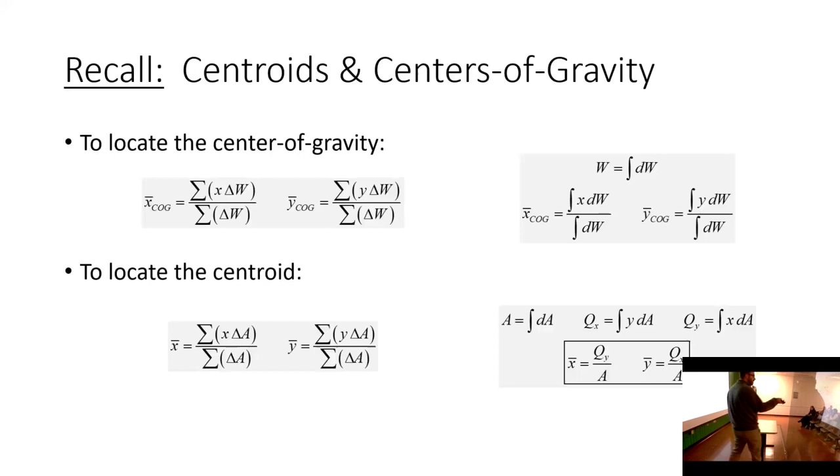Okay, so let's talk about centroids of 3D bodies or volumes. I think you could probably predict by now how we're going to do this. If you remember, if we wanted to locate a centroid, we're computing a weighted average of the areas. If we have a line group like a truss, but in your last homework assignment, we just compute the weighted average of those line segments. Well, for areas, we end up using our centroid references as well.

For volumes, we're just computing a weighted average of the volumes. So if we want X bar, it's the sum of X times the volumes divided by the sum of the volumes. For Y bar and Z bar, respectively, it's all the same thing. So instead of summing or integrating in terms of area, we're summing or integrating in terms of volume.

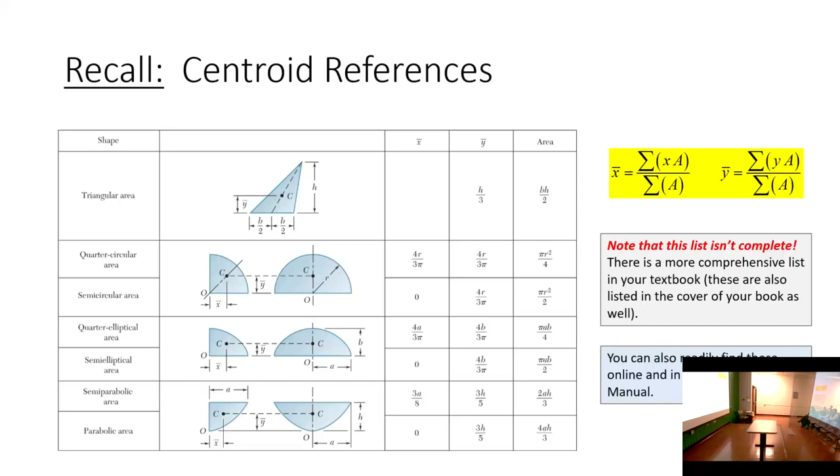Now, one of the interesting things about this is that by and large, a lot of times you're still able to utilize these as your centroid references. It is only when the shapes truly become three-dimensional that you really need to worry about dealing with 3D centroid references. What I mean by that might be something like a hemisphere or a semi-ellipsoid. To be frank, we're not really going to worry about a lot of that in here. A lot of the components that we would need to be worried about in engineering are hopefully ones that we can break down into relatively easy cross sections to deal with.

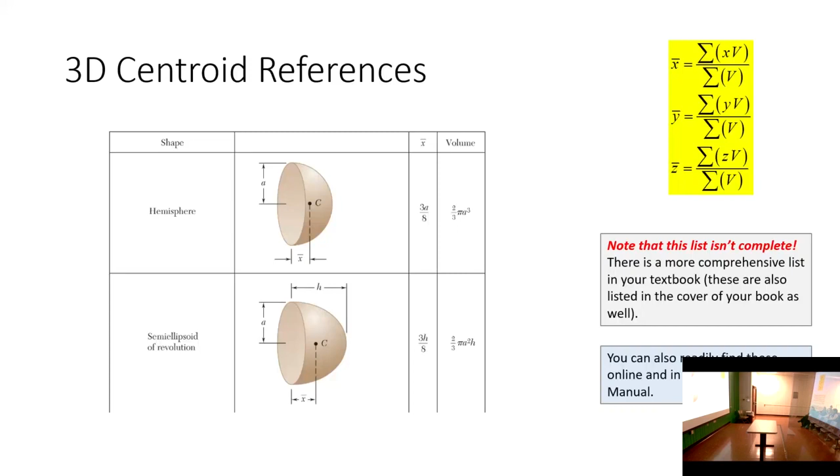So what we're going to do today is look at this machine part, and we're going to look at determining the centroid of this machine part. Probably what we won't do is compute X bar, Y bar, and Z bar—we'll probably just do one of them. But what we are going to do is break this down into simple shapes and compute the X, Y, and Z for each of the individual shapes.

Because if you get that and you know how to compute, let's say, Z bar, well, then X bar and Y bar are incredibly easy to understand. And again, as I said, this is a 3D part, but I think we're going to be able to make use of a lot of our 2D references, and you'll see what I mean here in a bit.

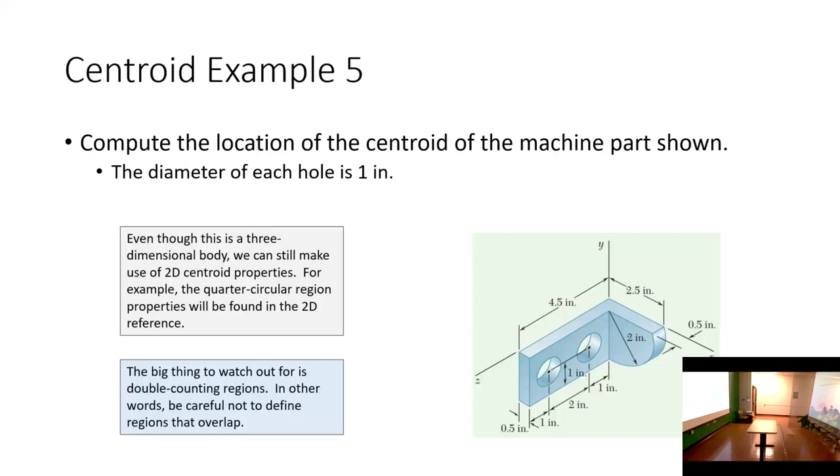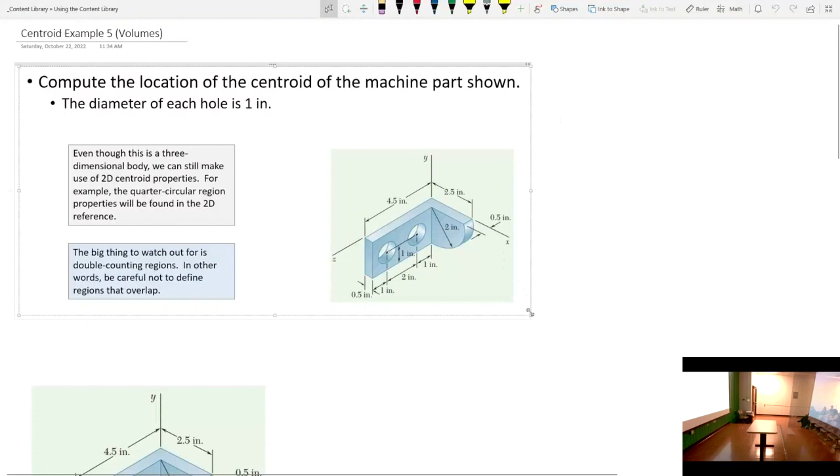Okay, so let me make this a little bigger so that we all can see what's going on.

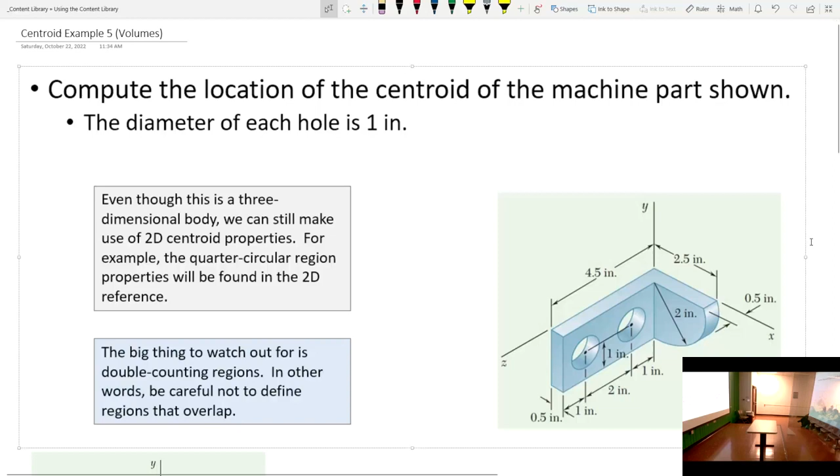Now, in order to do this problem, we need to break this down into a series of simple shapes. I kind of cheated a little bit because I've got the cross-section, or the schematic, copy and pasted over and over again so I don't have to keep scrolling up and down. But the idea is that as we break this down, we can use this to ensure our bookkeeping is done appropriately.

So what we're going to do is break this down into a series of what I'd call simple shapes. We're essentially going to have 4 regions to deal with: a rectangular prism, this quarter circle region, and 2 circular holes. For each of these, we need to compute not only the x, y, and z for the centroid of these individual shapes, but also the volume.

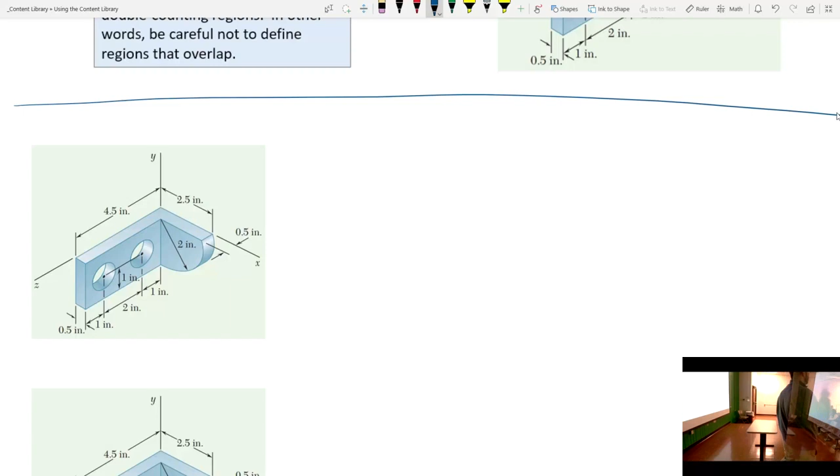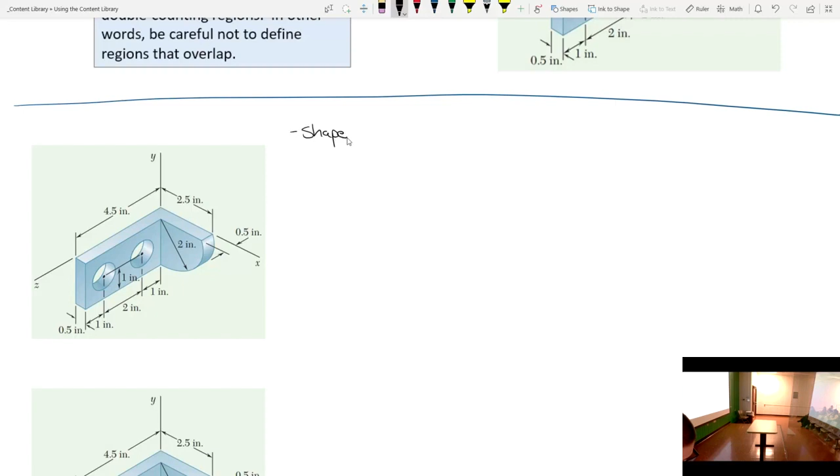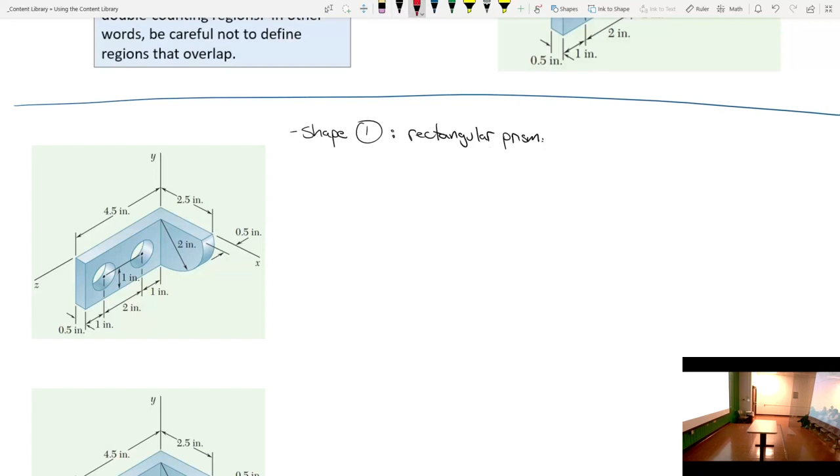So let's start with what I'll call shape 1. Shape 1 is a rectangular prism. Let me try and draw this out. I'll show you the way I'm going to split this up, and probably the most important region to focus on is this overlap region right here.

So let's look at this circular region right here. The radius is this corner part, because this is 2 inches down to this being 2 inches. So really what I want to do is break off that circular region, so I'm going to basically say that this is my prism.

And what we'll do is draw some dashed lines here and some dashed lines there to indicate that that's the prism we're looking at. Now I'm going to redraw this prism over here so we're all cognizant of the dimensions and data we need to consider. So it's going to look something like this.

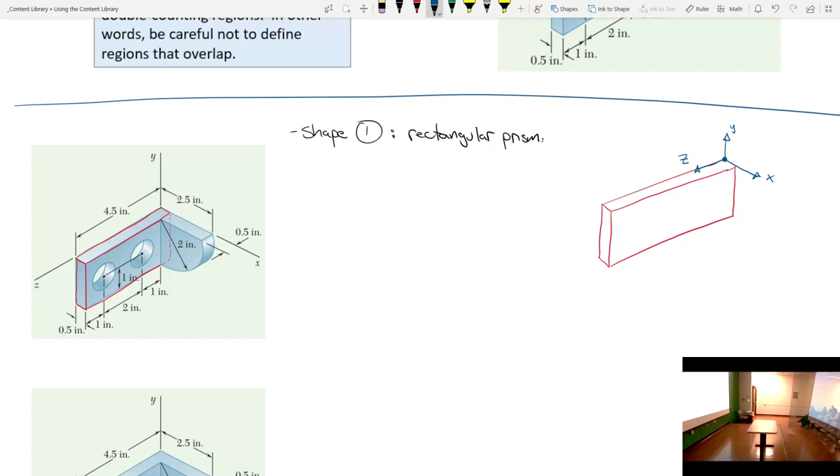How wide is this prism along the x-axis? Half an inch. How about how tall is it along the y? Does anybody know what that is? 2 inches, exactly. While it's not explicitly called out, that's where the radius of this circular region comes in. And how about the length along the z? 4.5 inches, exactly. So that means this dimension here...

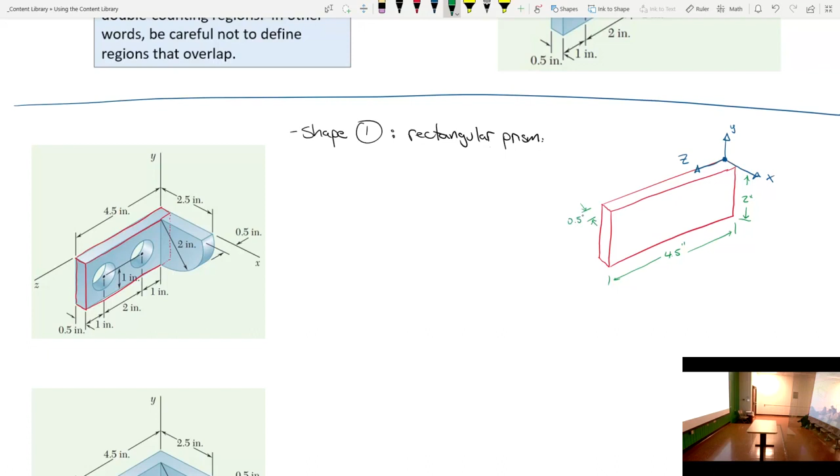So there we go, in order to compute the volume: 0.5 multiplied by 2, times 4.5, is 4.5. So that's going to be 4.5 inches cubed.

But I also want an X, Y, and Z. What I mean is, would you agree that for a rectangular box, the centroid is somewhere about right there? So my question is, with respect to this origin, what are the coordinates of that point? Along the x-axis, what are the coordinates? 0.25. What about along the y? Negative 1, not positive 1, negative 1, because here's the origin, we have to go down to get to the centroid. And along the z? 2.25. So this is going to be 0.25 inches.

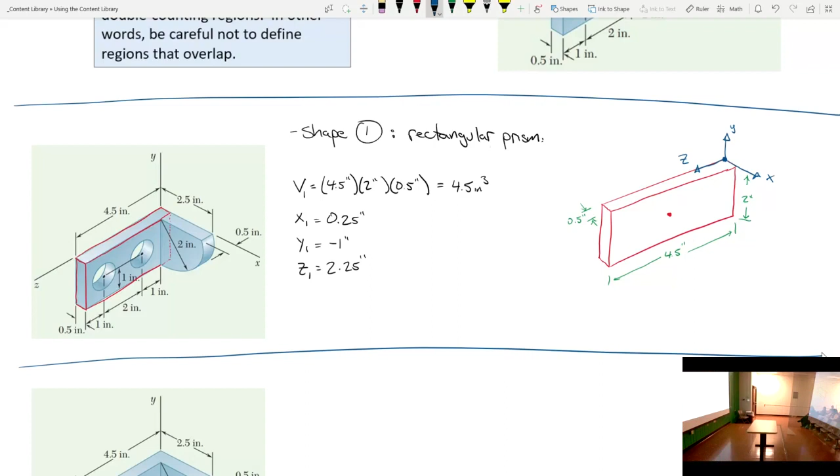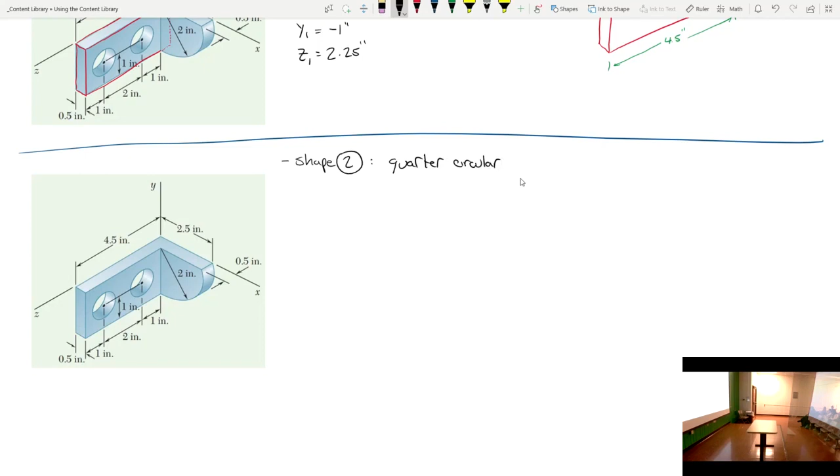Now let's go to shape 2. Let me move this down a little bit. So in this case, shape 2 is this quarter circular region.

Now I'm going to scroll up a little bit because we've got to make sure we don't overlap. Here's what I mean by overlapping. Would this be the quarter circular region? If I define the quarter circular region like this, to go from here all the way over, would that be right? You're shaking your head no. Why? Because I already accounted for this little wedge over here. That's exactly right.

So what that means is that region's got to look like this.

That's the region of interest. So you can see between this region and this region, I'm not overlapping. I'm not double counting area.

So now I have the unenviable task of trying to replicate this schematic over here. I will do my very best. Let's see. I think I did all right. I think I did okay.

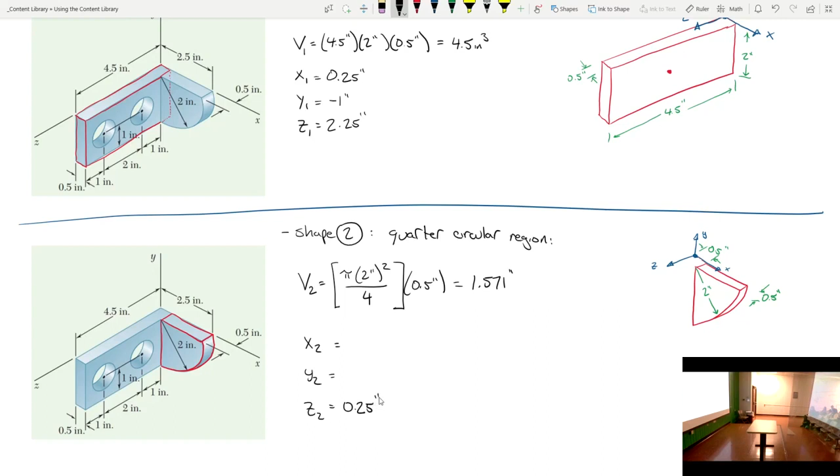But the other one, not so much. You may not remember that one, but that's why we have centroid references. That's why we can go back to this. And it's funny how I'm looking at the centroid references for a 2D region, not a 3D region, because really all this is a two-dimensional region that's been extruded. So if I have a quarter circular region, x bar and y bar is 4r over 3 pi. It's the same thing we have over here.

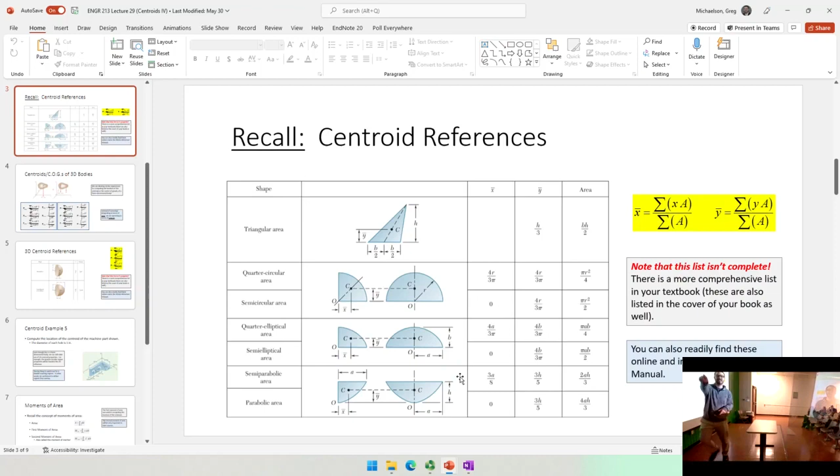So what I can do is say x bar is 4r over 3 pi. But is that right? I have to add half an inch. That's exactly right. Because 4r over 3 pi will get me from here to the centroid, but from the origin I have to shift over another half an inch.

Oh, drop my pen. Okay, I'll help you out with that one.

Now, what about y2? What's the formula going to be for y2? This is 4r over 3 pi plus a half an inch. What's y2 going to be? Do we have to add half an inch? We're just going down, but that's the key word. Say it again: negative 4r over 3 pi. Exactly.

Now, for shapes 3 and 4... we kind of need to come up with a numbering scheme. So let's call that one 3, that one 4. It doesn't really matter, we just need to pick one. Now they're both going to have the same volume.

And again, this is a circular region that's just been extruded. So the volume is going to be pi r squared times the thickness. But is that formula accurate? Shaking your head no, why? It's a hole, it needs to be negative. 100% right, we're removing that area.

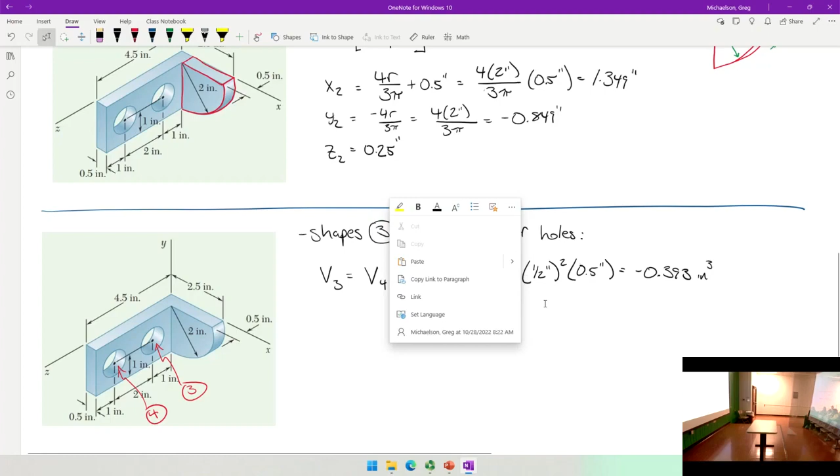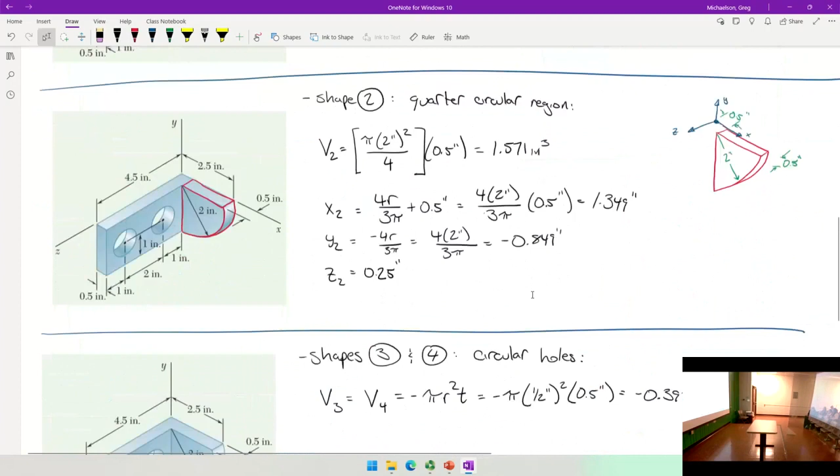Now, the problem said these were 1-inch diameter holes, or half-inch radius holes, and that's the thickness. So when it's all said and done, you plug and chug, you get negative 0.393 inches to the third. I just realized this whole time I've been saying the volume is inches, that's wrong, that's inches to the third. Oh okay, I got it right on the first one. Yeah, that's inches to the third.

But in order to do this, we're going to need an x3, y3, z3, and we're going to need an x4, y4, z4. So let's do the x's. How far is it from the origin to the center of these holes along the x-axis? Say it again—exactly, and that's the case for both of them.

All right, what about y? How far is it from here to the center of these holes? Negative 1. That's exactly right.

Really, the only one that changes is the z. So, how far is it from here to the center of this hole?

We'll start with just 3. 1.5 inches. It would be very easy to say it's 1 inch, but remember, 1 inch goes from here to here. You have to go another 1/2 inch to account for the thickness of the material. So this is 1.5. What about Z4?

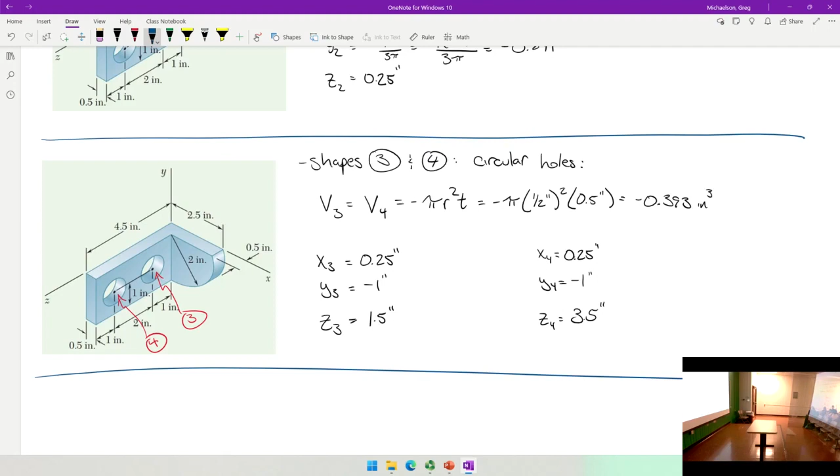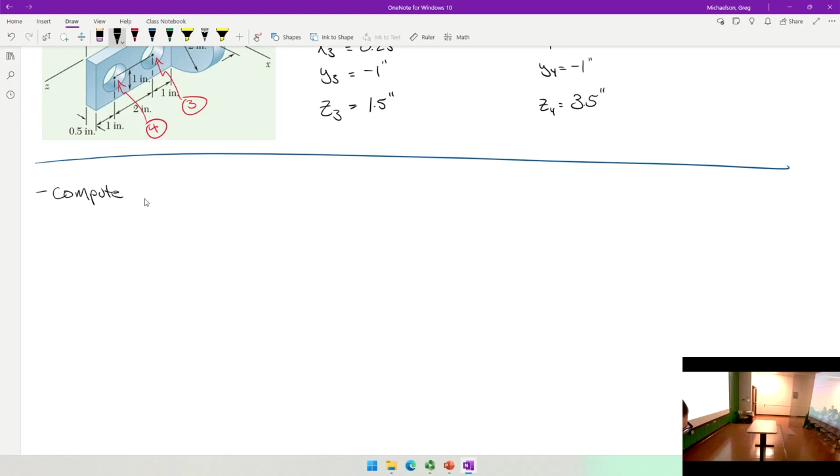Okay, so what I'm going to do is compute now the location of the centroid. But I'm only going to do one of them. I'm not going to do all 3, and you'll see what I mean. Once you do one, the rest are pretty easy. So what we'll do is we'll say we have a shape.

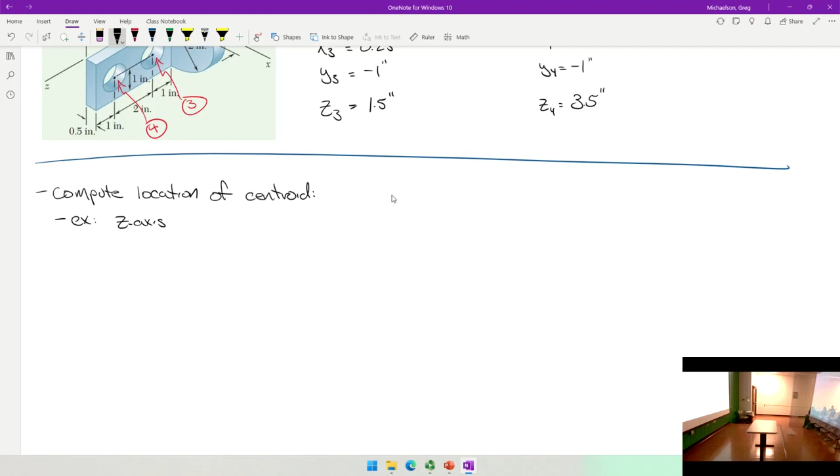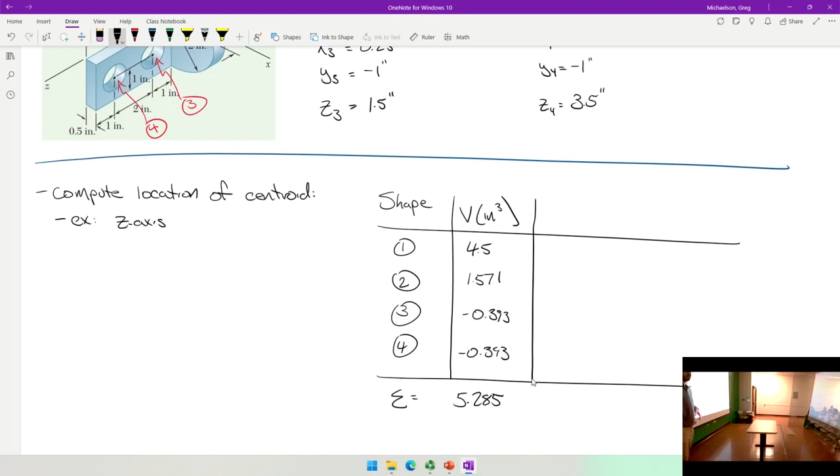And like I said, for this calculation, I'm only going to do the z-axis. But if I did the x and y, it'd be the exact same.

Now what I'm going to do is list the z coordinates. That was 2 1/4. That was 1/4. And then you can see the z3 and z4 right up there.

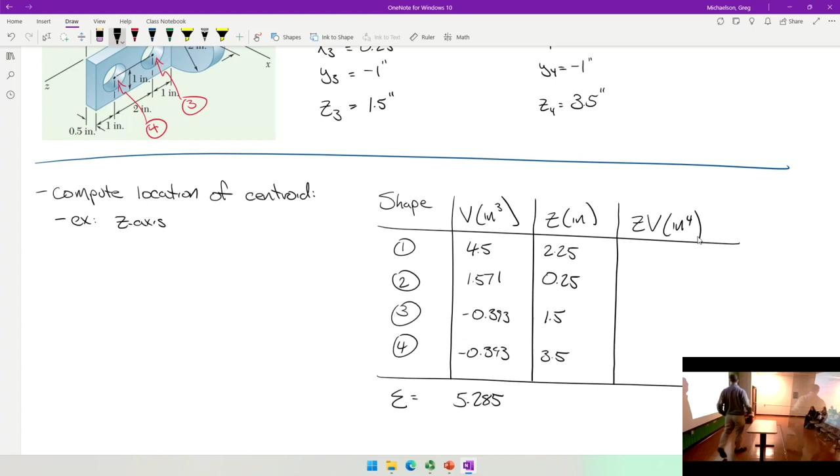And so now we're just going to multiply the two. I know the units might be a little weird, like inches to the fourth. Are we entering the fourth dimension? That's just a moment of area, or a moment of volume.

So what do we do? We just do that times that, that times that, that times that, that times that. We just chug it out.

Given that this is simplistic, I'm just going to do this one for you. So this is 10.125. This one's 0.393. This one ends up being negative 0.589, negative 1.374. And when you sum that up, you get 8.554.

I guess I put my leg up and I woke up Siri. All right, my phone's haunted, but it's Halloween, that makes sense. Come on, I'm gonna have jokes.

All right, so 8.554 inches to the fourth over 5.285 inches to the third, and you all can chug that out. Ends up being 1.618 inches.

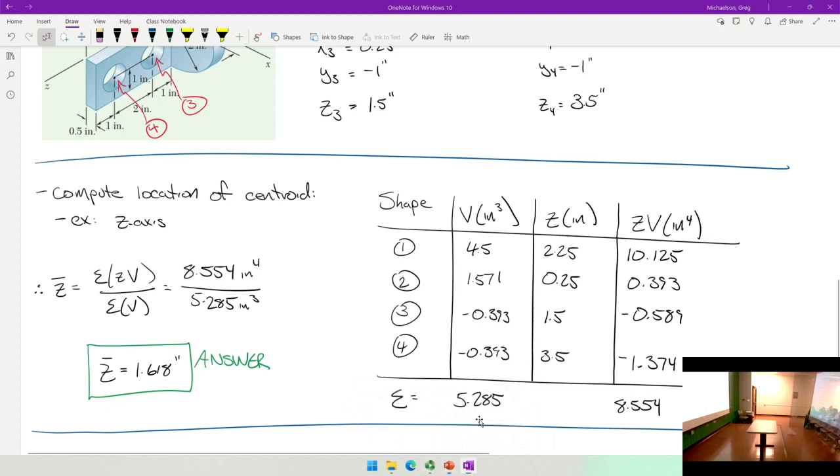I could define a second moment of area. I could define a 56th moment of area. And basically it would just be that differential element of area multiplied by that distance, however many times, or by that moment arm, however many times I deem appropriate. So the 57th moment of area would be the integral of x to the 57th times dA.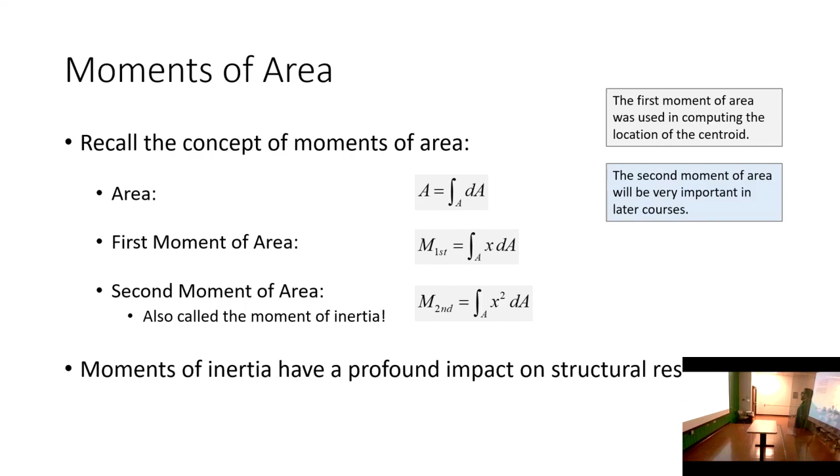Say again? It's harder to flex the beams that way. In other words, the beams are stronger that way. But why? Common sense tells you that, right? But why? I'm asking you why. I posit to you that the reason they are stronger that way is because along that orientation they have a larger moment of inertia. That's what the moment of inertia is, essentially.

In a nutshell, at least for the land of structural mechanics, and when I say structural mechanics, I don't mean just civil engineering. I'm talking about anything where you're taking an element and applying force to it. So this applies to you mechanicals designing machine parts and you biomedicals designing implant devices or anything that you're going to do. The orientation at which you apply forces has a profound impact on how it's going to perform, okay?

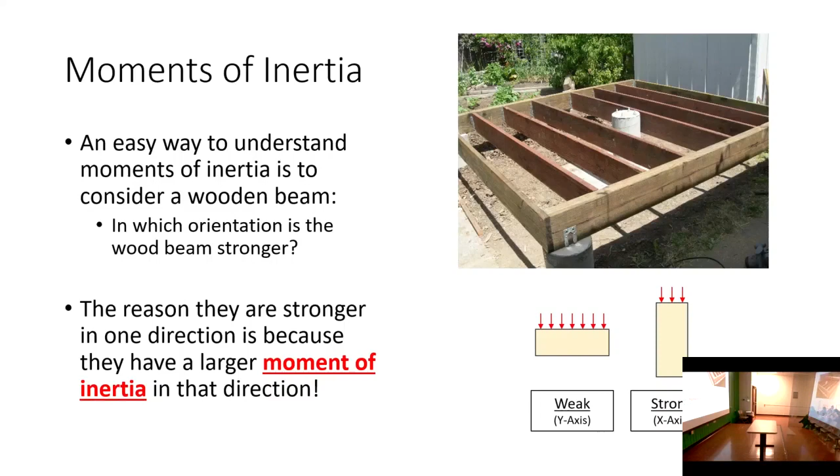This is a simple example to kind of wrap your head around it, but there are applications in just about any field of engineering. And so that orientation, I think it makes sense, but I'd like to apply some mathematical rigor to it. What we're going to do is go about looking at the moment of inertia of a basic region like this.

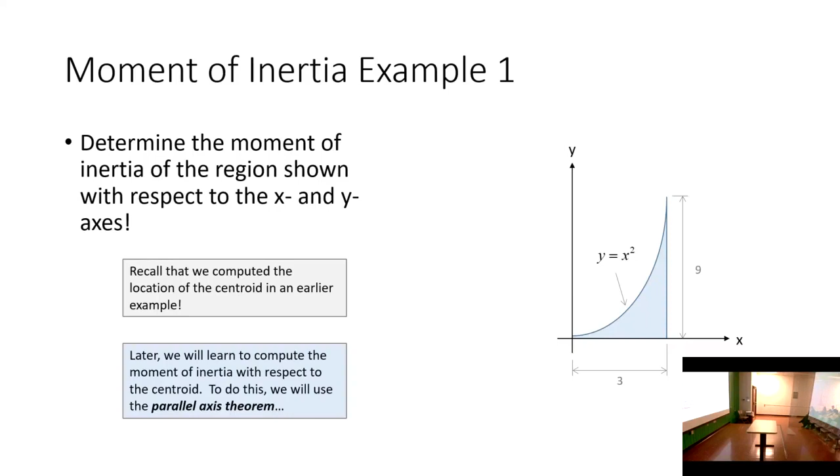And remember, we kind of did this before. We looked at this region, and I want to show you what happens when it comes to computing the moment of inertia. Just to make sure we're connecting this to concepts we've already done, remember we had one homework assignment where I made you derive a formula. But then past that, we said we're just going to use the formulas to compute the moment of inertia, or compute the centroid, of composite shapes. Same thing's true with the moment of inertia, so it's going to be a pretty straightforward algorithm, but we'll get to that later.

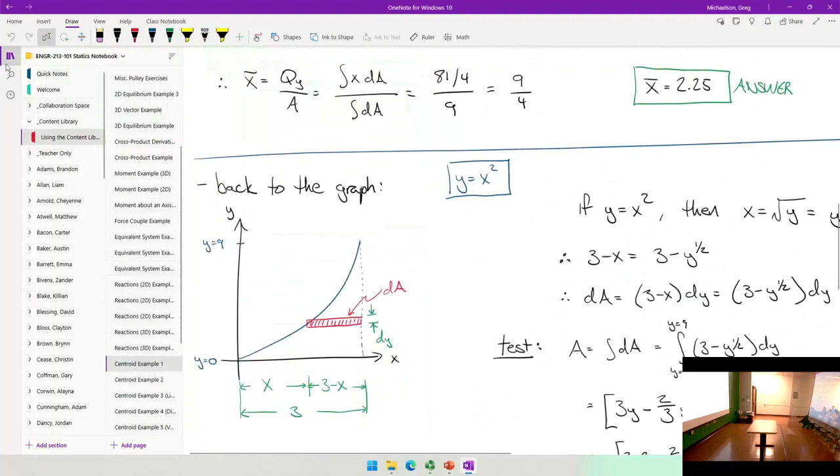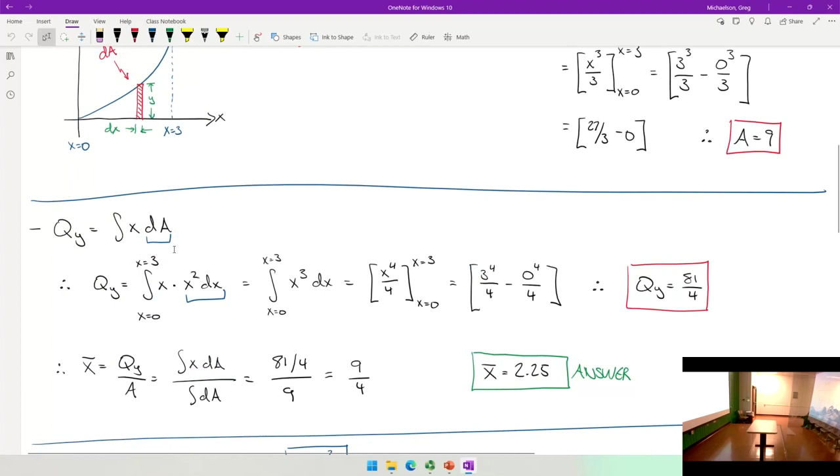So let me refresh everybody's memory real quick. We had done this shape before, and we found the location of the centroid of this region. The way we did that is we first started off by integrating dA to determine the area. We defined what this rectangle looked like, and we integrated and got an area of 9. Then we computed our first moments of area: we calculated the integral of x dA to get x bar, then computed the integral of y dA.

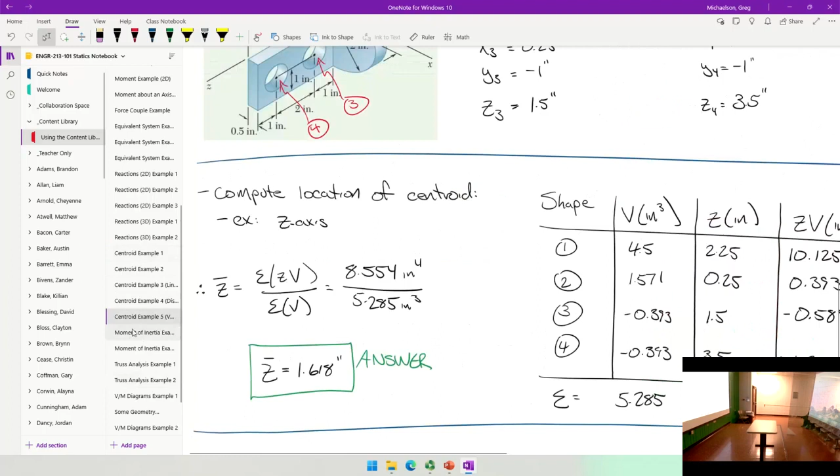We got y bar. So now all we're doing is computing the integral of y squared. Shouldn't really be anything that's all that challenging, but just trying to connect this to some stuff that we've already done before.

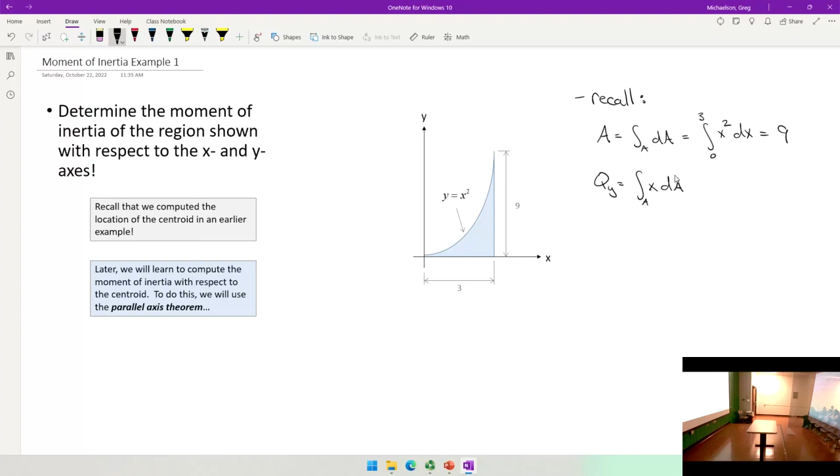So what I'll do is I will say... remember the subscripts were flipped? Remember how the integral of x dA, we called that Qy? We did that because how far is it from, let's say, the y-axis to our centroid? From the y-axis to our centroid, that coordinate is x, right? And so this was the integral of x cubed dx, if memory serves.

Hold on, let me turn back to what we had done before. I don't want to keep going back and forth here. So the integral of x dA, that was 81/4. Then we had this.

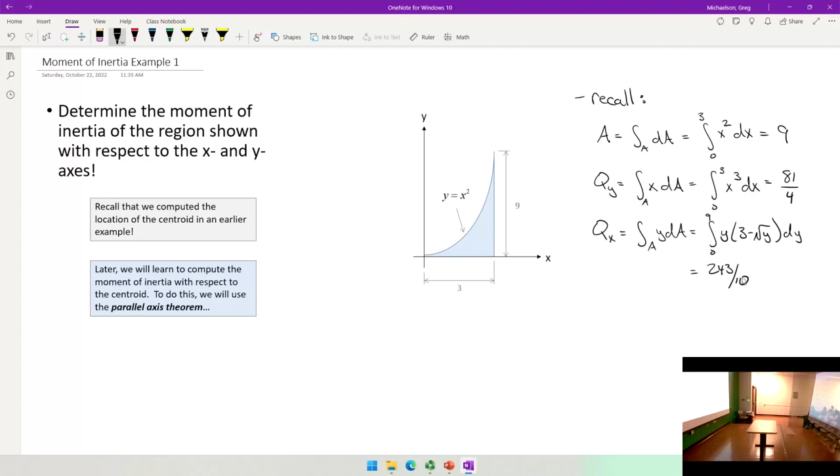With this one, what we had is the integral from 0 to 9 of y times 3 minus the square root of y, dy, which ended up being this. Remember, we had dA equal to either x squared dx, or dA equal to 3 minus the square root of y, dy.

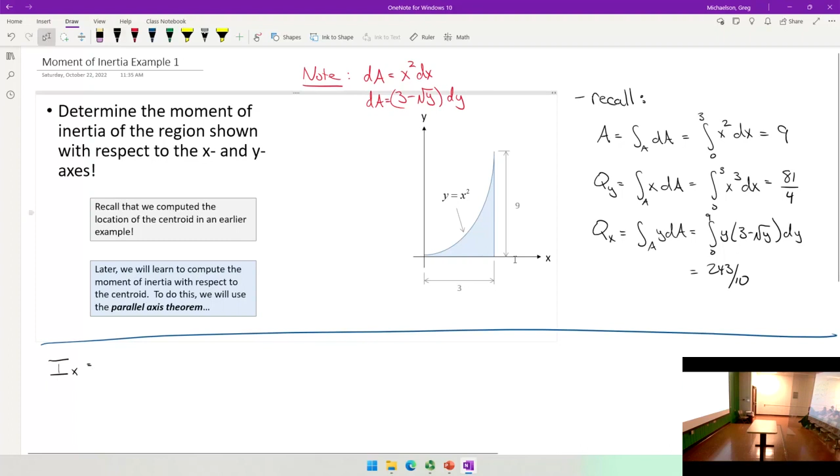So all we're going to do for the second moment of inertia, again I think you'll find this pretty simple, is if I want to find the moment of inertia with respect to the x-axis, all I'm going to do is integrate y squared. That's all I'm going to do.

Just like before, I'm going to integrate from 0 to 9, y squared times 3 minus the square root of y, which is going to be the integral of 3y squared minus, if I have y squared times y to the 1/2, that's y to the 5/2, not 5/5. That should be a pretty easy integral to evaluate. Am I correct? I'm hoping. So that would end up being this when you chug it out.

And then the same thing with this, so Iy is this. This one's easier. When you chug that out, you get that. Oh, that's not approximate, that's actually... yeah, no, it's approximate.

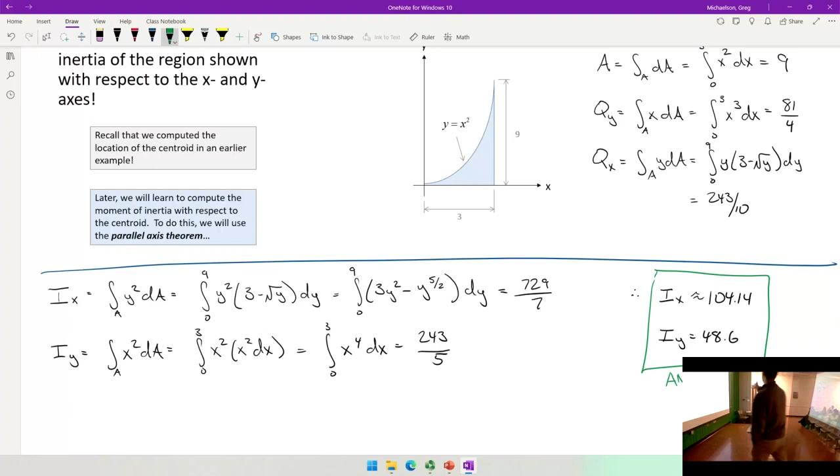Now, would it make you feel better if I told you you aren't going to have to do any integrals on this? Would that make you feel better? You're not, don't worry. But I want to make a point with this. When you chug this out, these are the numbers you get. I'm not really interested in turning this into another Calculus 1 lecture, but barring me going through and chugging out the integral, would you all just take these at face value to say these are the answers to these integrals? Are you believing me on this? Okay, alright, let me show you something.

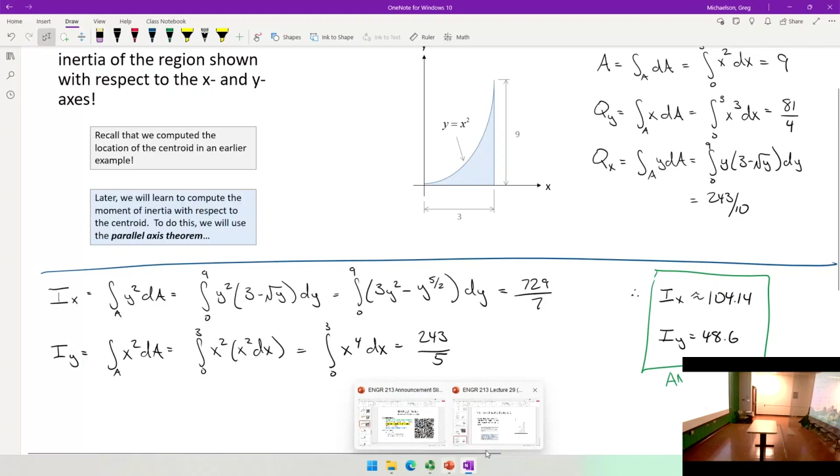Let's go back to this image. I posit to you that the moment of inertia is a function of what orientation you're looking at. If I were to compute the moment of inertia of, let's say, a rectangle, I would get a larger value for Ix than I do for Iy. I think based on our last example it should make sense that you're computing different integrals, so you should get different answers, and one's probably going to be bigger than the other.

I posit that for a rectangle, you're going to get a bigger moment of inertia about the x-axis than about the y-axis. That moment of inertia is a reflection of flexural stiffness. It's the reason why if you're building a porch in your backyard and using wood as your floor joist, you face them up like this, not like that, because the moment of inertia will be larger in that direction than the other.

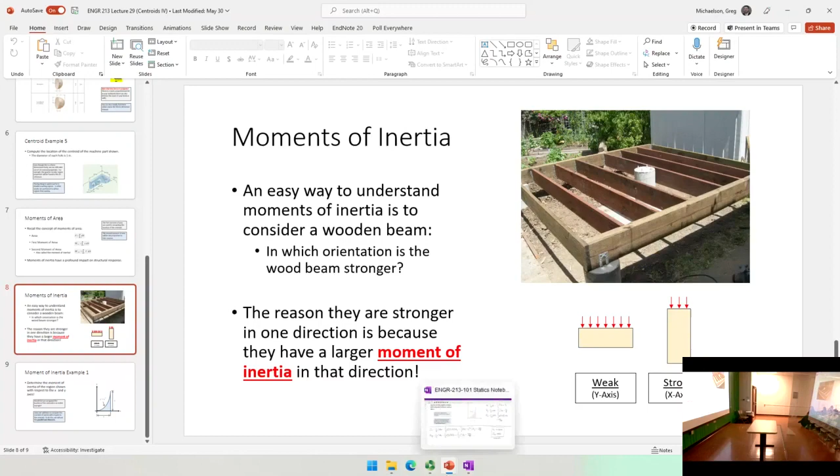To reference that back to the example we just did, let's look at this shaded region. Notice how it's kind of more vertical than horizontal? It's almost as if this shaded region is oriented in the same way as our wooden floor joists in our wood deck. Notice how we're getting a larger moment of inertia this way than this way. Stands to reason that if instead of a rectangular beam, my beam looked like this, it's going to be stronger this way than that way. And that's what the math is telling us.

Now, are we making floor beams that look like this? No, we're not. But we are making floor beams that look like this—that's very common, incredibly common. So how do I determine the flexural stiffness of something like this? I break it down into simple shapes, because that's just a bunch of rectangles.

So we're going to apply the same idea on Monday. The idea is we're going to take a realistic example, break it down into a series of simple shapes, and apply an algorithm to compute the moment of inertia. The algorithm starts by locating the centroid, and then we apply it later—it's called the parallel axis theorem. I will explain that on Monday. I don't want to information overload you today.